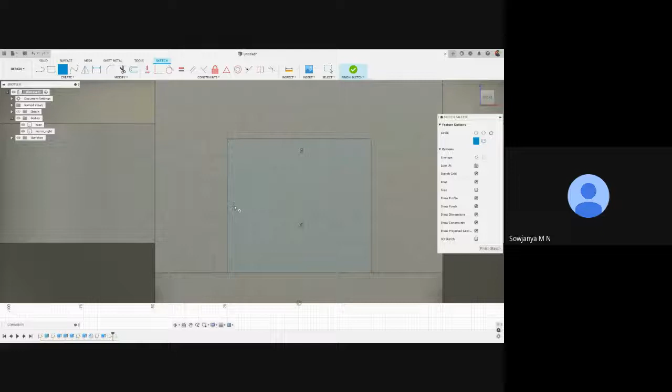It will draw a dotted line, so similarly I have to do it for the other side as well. I can see a triangle. Now I will just hover down in the straight line, and you can see both of these lines are shown, meaning I am exactly in the center of the box. Now this should be somewhere around

whatever shaft diameter you want. For this motor, I want it to be a 10 mm shaft diameter. I will now extrude it, and it will be somewhere around 5 mm, should be more than enough. Here I will join it because I want the shaft of the motor to be joined with the motor. It should be one single body, so I am using join.

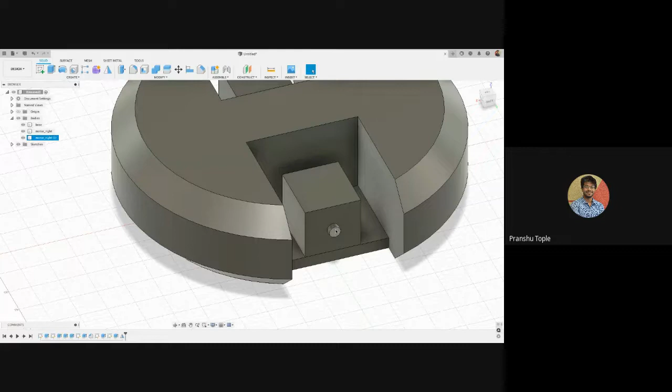I will press OK. Now if I want to hide the base, I can hide the base. I still have the motor. Now if I get ahead in the timeline, you can see the motor we made as a mirror, and it will also have the new shaft that we made. So this is how you can scrub back and forth between the timeline, and the changes will be affected. So no matter if you make any mistake previously, you can correct that mistake later on.

Okay, so I will rename this motor as motor underscore left.

So what is the next important thing in a robot? After base is done, after motors are done, it's the wheels. So let's make a wheel. So where is the wheel? Wheel will be connected to this shaft, so I will select this shaft.

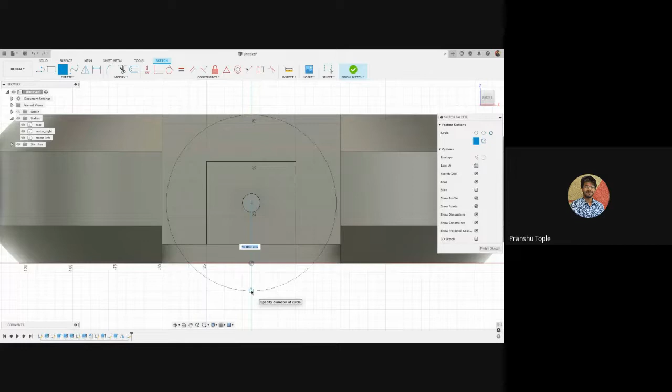And here I will create a circular wheel. So here I'm just making sure that the wheel doesn't collide with the sides. I guess 95 mm diameter wheels is perfect for this. I will finish the sketch.

Here I can select it. If I want the wheel to have a hollow inside, I can just select this one face. So if I extrude it now, it will have a hollow wheel like this. But if I also select this face, it will be a solid wheel like this. So depending upon your necessity, you can choose it.

And I guess 25 mm thickness wheel is more than enough. Again, just make sure this operation is set to a new body, because we are making a new thing, not joining it to the motor. New body. Okay, what is this? This is wheel height. Okay, there we have a wheel.

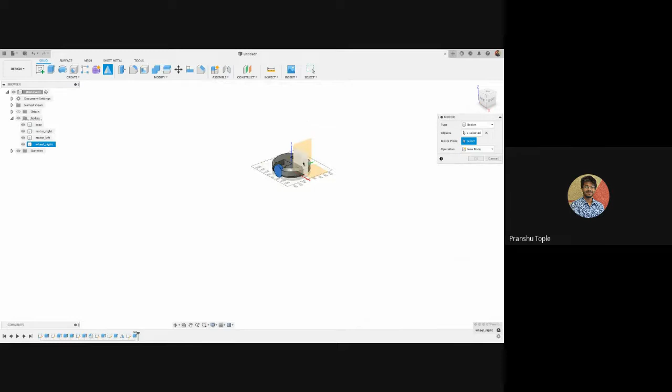Now I want to mirror this wheel. I will select the wheel, click on mirror, and select the mirror plane. What is the mirror plane? I will zoom out so that I can see the origins of this, and this is my mirror plane, exact center. And now we have another wheel on the other side.

Any doubts until now? It's a very basic design. If you're not getting it, please let me know, because it can be very difficult later on. So if you have any doubts until now, I can reconsider it.

Sir, can we do the same thing by using the timeline? Meaning the wheel is automatically added with the use of mirror? No. Why not? Because at the time of mirroring, we only mirrored the motor, we didn't mirror the wheel. Wheel is a separate object that we are creating. Yeah, there is one way to do it, but it will become complicated.

I can show you if you want. So I will undo this. Okay, so now I'm not creating this wheel as well. I'm just going back, instead of undoing, let's get back to where we actually made the wheel.

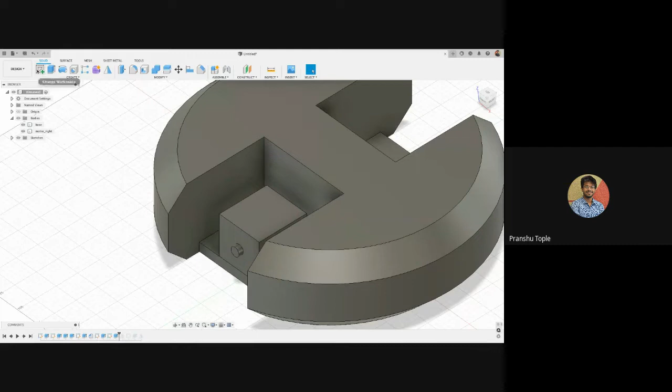Yeah, we have the motor now, so this is the future of the timeline. I will just add a wheel. From this, I will make a circle of 95 mm diameter. I will select the faces. If you want to select multiple faces, please press Shift or Control. Press E to extrude it externally, like 25 mm. This time while joining, I don't want join, I want it as a new body.

Okay, now if I take it one step ahead, you can see only the motor is mirrored. So what I can do is right click on the mirror, edit feature. So what does it say? Edit feature - what type of material or thing do I want to mirror? It is bodies - so these are all bodies.

Mirror plane is also selected, but how many objects are selected? It says only one object. So I can select one more object. So I can just go over here. I want to mirror motor as well as wheel. I guess it is not possible. It is showing me some error.

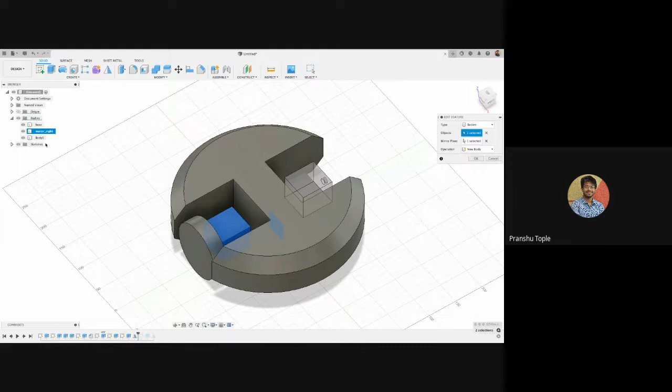Wait a minute. I will edit the feature again. I will deselect it. Now objects, I want wheel and motor. Okay. No, you cannot edit feature. You can only select one while mirroring. So it is not possible.

So there is one way you can do. You can just create one side of the robot and at the end you can just mirror them all one by one. So mirroring you can do at the end. I just wanted to show you how it will look. So that is the reason I made it like this. Okay. So now I guess this robot looks really good. If you want, you can add more things to it.

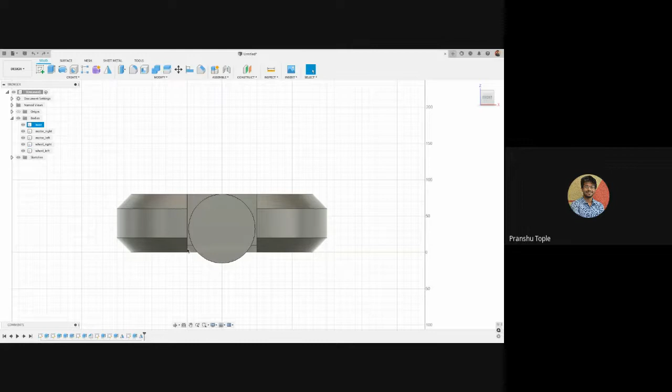So obviously our robot won't balance on two wheels. It will need something to balance on. It can be a caster wheel. A caster wheel is a very smooth wheel that we can use if the robot wants to move along. So if you see robot caster wheels, they are small ball kind of structure. So these are how caster wheels are available. Small balls that rotate freely so that the robot can move in all directions.

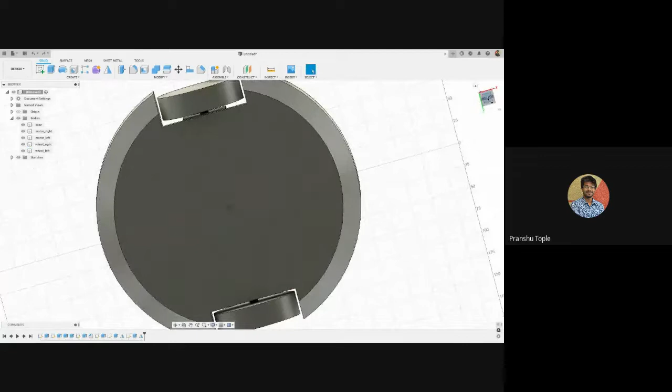So we are making something like this. Two wheels, a caster wheel in the front and the back, something like this. Okay, so let's make it. So we already have wheels. Let's make caster wheel at the bottom so that it has something to balance on. So here, what I will do is create a sketch. Where do I create a sketch? I create a sketch at the bottom face. This is my bottom face.

Now here, first I want to create mounting points for my caster wheel. So I want one mounting point over here. A 10 mm caster wheel is more than enough, and another mounting point over here. So one at the front, one at the back. Finish it. I will select this face, and again I will press Control on my keyboard and I will select this other face as well. So now these both faces are selected.

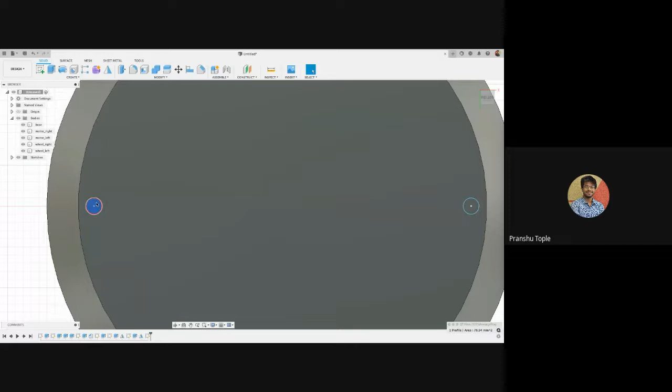If I wouldn't have pressed Control, if I select this face and then the second face, that will become unselected. So to select both the faces, I am pressing Control. Both the faces are selected. Now I will extrude it by a little bit. How much? I guess 5 mm is more than enough. And this time I will join because this is a mounting point, not a caster point. This is just a mounting point so that we can mount it together. So the mounting point is done.

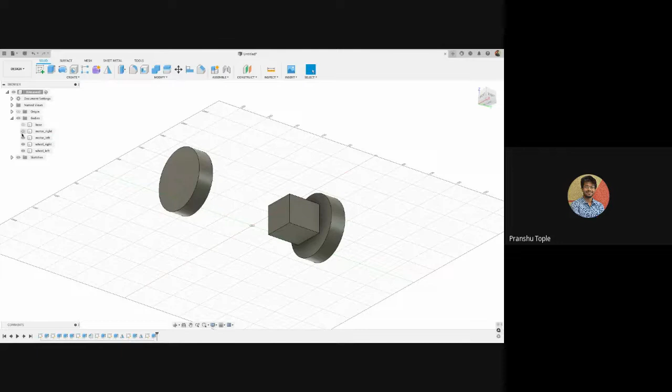Now over this mounting point. So now we can see if I go into home position, this is the base of the robot. This base has the mounting points added to it. We have two motors, which is motor right and motor left. And we have two wheels, wheel right, wheel left. If I just want to work on base, I can work like this. If I just want to work on motors, I can just select these. I can deselect it. I can do whatever I want with these.

If you want other motors to be added into your design, if I want this motor, I will just right click over here, insert into current design. But before doing that, it will give me error because you can only add that if this is saved. It is not saved currently anywhere. So I will save it as fdpbot. Save it.

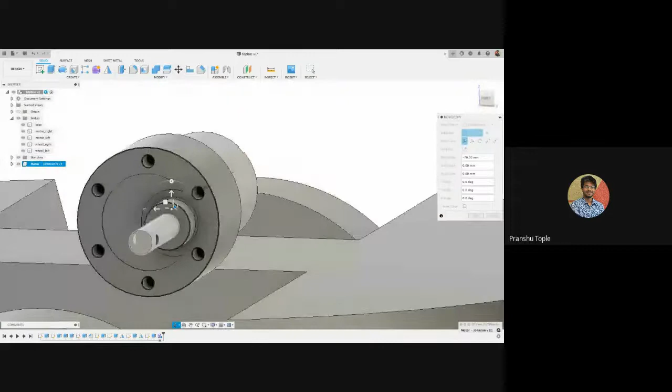Now I will insert into current design. This motor is inserted into current design. Now I can move it along wherever I want. So this is a very detailed motor. It has all the screw holes, it has all the gears inside. So you can use a detailed model like this, but as we are doing a very basic structure, that is the reason I am not showing you the detailed version. You can just make some basic geometric shapes and it will work the same.

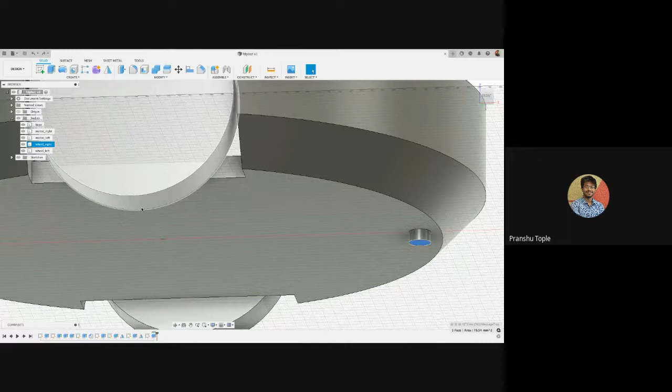Okay, now we have the mounting points, but as you can see, if we draw a line somewhere over here, this doesn't touch because we still need a caster. So for making the caster, first we need to find what is the height between this face and the tangent of the wheel. Why the tangent of the wheel? Because our tangent of the wheel will be our floor, right? So how can I make a tangent to the wheel?

I will click on this and construct a tangent plane. So I want to construct a tangent plane. I will click over here and I will select this bottom face. So I'll just click on the bottom. See, a tangent plane is created. This is the yellow plane, which is tangent to this wheel. If I want to put it at some angle, I will put it. If not, I will just keep it at 0 degree and I will press OK.

So now I have two faces. I have this one face and I have this second face. I want to measure what is the difference between them. Just by the measurements that I took previously, I guess it should be around 10 mm, but let's check. How can you check? You can use a tool called inspect. So here in inspect, I can use measure.

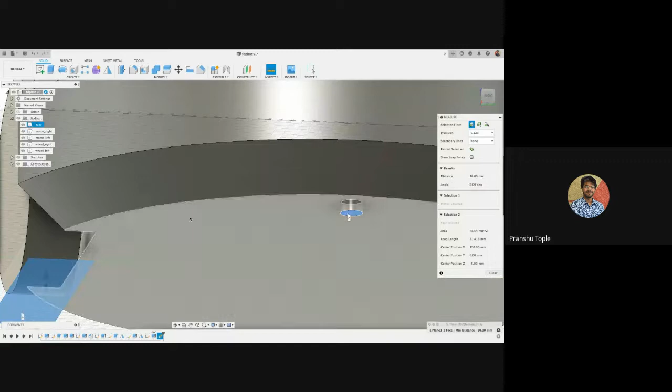I want to measure distance between this plane. I'm selecting this plane and this small plane. Here it will print it. The distance is 10 mm. Here it will also show. So if you see right here, it is showing. Like this is the plane and the height is 10 mm.

That's great. So now, if I want to hide this construction, I can just hide it over here. Or if I just want to hide this specific construction, I can click over here, so that in future, if we make any new construction, those will be visible, but this won't be. So now I will again go down. I will click on this face. Again, I will click on this face. Okay. And I will extrude them again.

And this time it will be 10 mm because that is how much we want. But this time, instead of joining, it will be a new body. These will be created as new bodies. Okay. And I will press OK. So now we have two casters. This will be the caster in front. Caster, sorry. This will be caster in back.

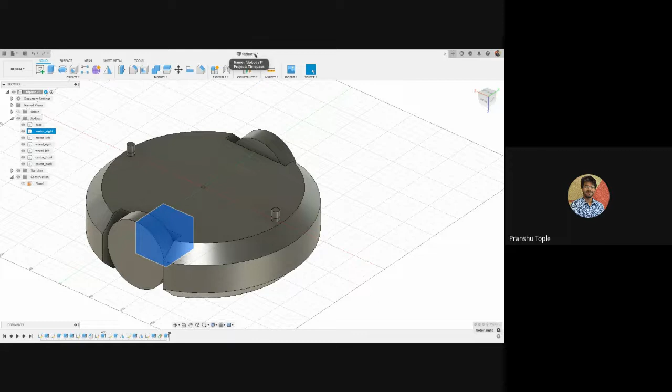Just make sure whatever name you give, please have it in small letters. Don't keep any capital letters. Even the name of the robot that you are giving to save the file, please keep it lowercase, no uppercase characters, because whenever we convert it into URDF, it will create problems. So please make sure everything is in lowercase characters.

Okay. Now, technically, everything is in place. These are touching the ground exactly as wheels, but obviously there is a huge surface area along which these are touching ground. So this will create a lot of friction, which is not good. So what I can do is I can create a curve. So just like the caster wheels that we saw previously, I can create a fillet.

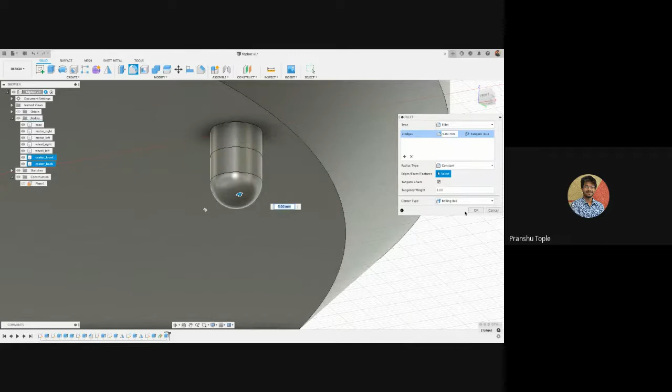So I will click on fillet. I will press control so that I can select multiple things. So this is the one fillet which I want to make. And this is another fillet here on this circle I want to create. And how much I want to create, I will just push it inside until it's a very clean, smooth semicircle. And I will press OK. So now this looks a lot more like the caster wheel. Understand?

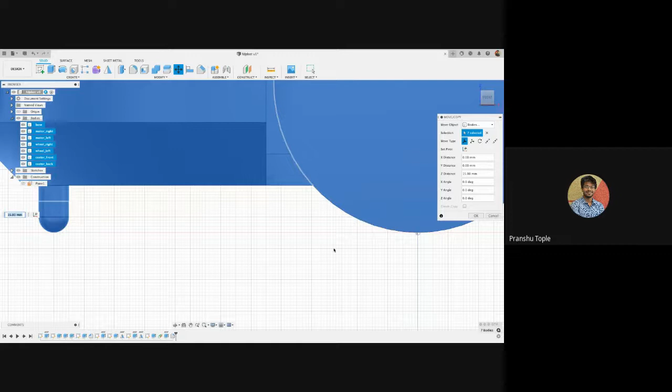Now, if you see from the side, if this is the baseline, the red line, if this is the x-axis, our robot is below the x-axis, right? We want our robot to be above it. So how can I do this? I can select multiple of these using control, okay, and press M to move. Now I can move this up. So I will just move it enough so that, yeah, it's touching the base. So we have moved it up by 15 mm. Now if you see, the shadow is also grayed properly and everything is in place.

So this is a basic robot. If I want to make it more advanced, I can make it. I can make multiple layers on it. So let's make it a little bit more fancy. We'll make multiple layers. This is the top layer I selected. I want some pillars on it. I will make a construction line and a circle. So this is my circle along which I want to make these small pieces, and I want it at 45 degrees.

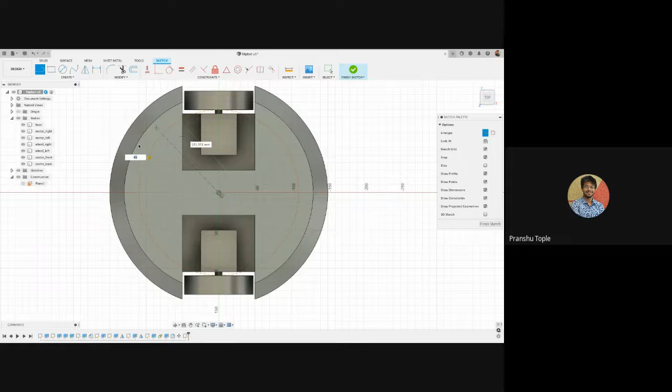So if I make it at 45 degrees, at this point, it will be equidistant. So here, these pillars I want in hexagonal shape. So I can make a circumscribed circle over here. Just make sure construction line is switched off. And here I want the thickness to be 2.5 mm. This is the radius, okay? This is radius. I will finish the sketch.

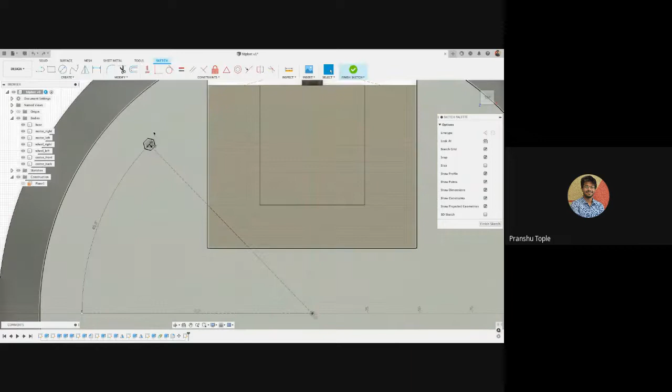I will extrude it. But instead of extruding, first I want it all along the circle. So what I can do is, I can go back to sketch. We are into the sketch mode. I will select this thing, select all 6 sides or select directly the sketch. I will go to create a circular pattern. It will ask me to select objects. Select all of these objects, which are the hexagonal lines. And what is the center point? The center point is this.

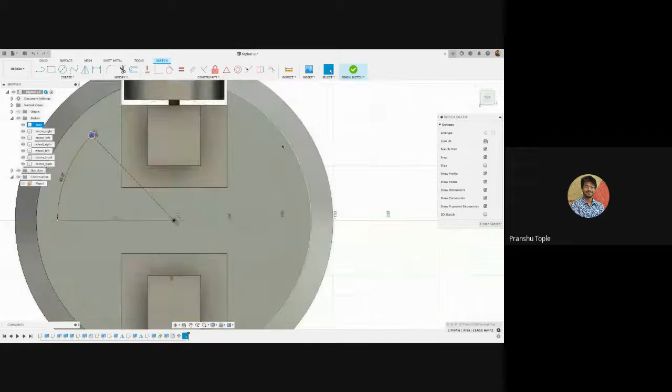Now it is asking how many I want. So it is by default 3. I will increase to 4. So here you can see one hexagon is here, one is made here, one is made here, and one is made here. So it's good. I will press OK. Now I have got 4 hexagons. I can simply extrude each hexagon at a time. I'm pressing Control at the same time so that I select all the hexagons together. My Control key is still pressed. And now I will press E to extrude them.

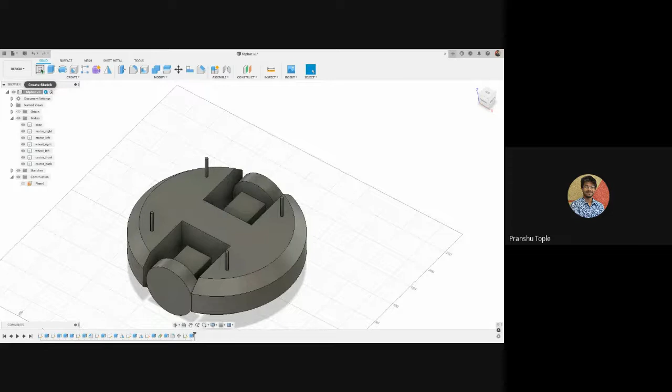And if I will extrude them, let's say for about, yes, 4 centimeters. 4 is more than enough. I will join this to the actual base. I don't want it to be separate. So here is our complete base. Now I want one more layer on top of it. It can be anything. So what can we add? We can add a simple circle. So let's add a circle on it. I will make a circle on this. A huge circle like this.

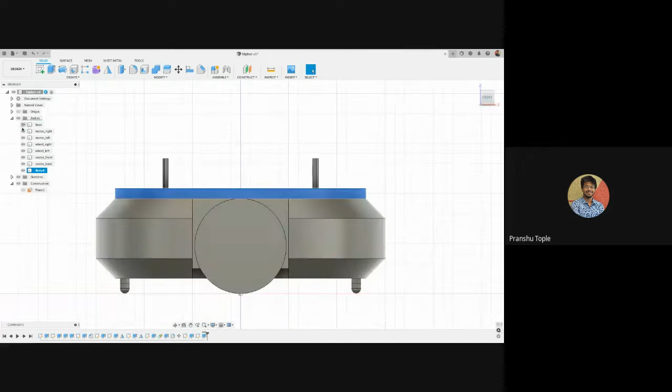Complete. Finish sketch. I will select all these faces using Control key. I'll just hide the base for a moment so that I can select these hexagons as well. And I will extrude it. I will extrude it 10 mm. It should be more than enough. Yes. Now I want this to be above the base. So I will take it somewhere over here. Great.

It's looking really good. Now I want to combine these two things. I want to combine the base and I want to combine this. So I can just select base, whatever is your parent. Okay. So I want base to be the parent. So we'll select first base and then the child. Press Control and then select the other part. And here there is an option for combining. If you don't see an option over here, click on Modify, Combine.

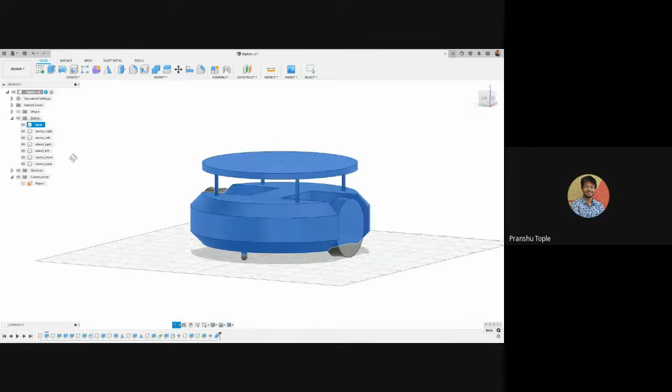Combine, it will ask what should be the operation. Should it be join? Should it be cut? What do you want? So mine is join. I will join it. Now this is one single base. This is how you can make a complete robot that looks like a Turtlebot. So what more was there in Turtlebot? Turtlebot 4. Let's see.

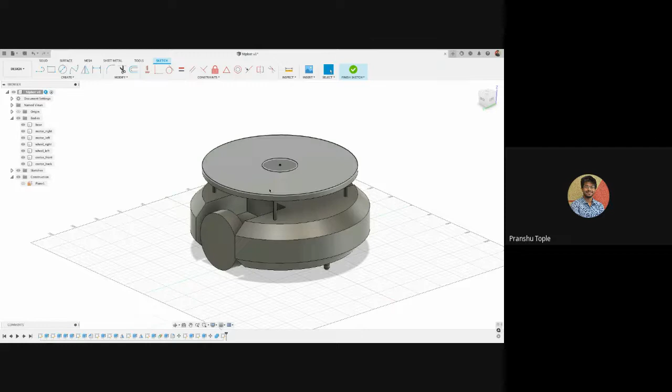Yeah, there is a LiDAR for navigation. There is a LiDAR. So let's add a LiDAR. So I want to add a LiDAR on top of it over here. Again, it will be a small LiDAR. So I guess 60 mm is more than enough for that as a diameter. Yes, I want a mounting base for the LiDAR. So what I will do is I will extrude a little bit of it. I will join it with the base, and then I will add a bigger LiDAR. So I will add 15 mm, and instead of joining, this will be a new body.

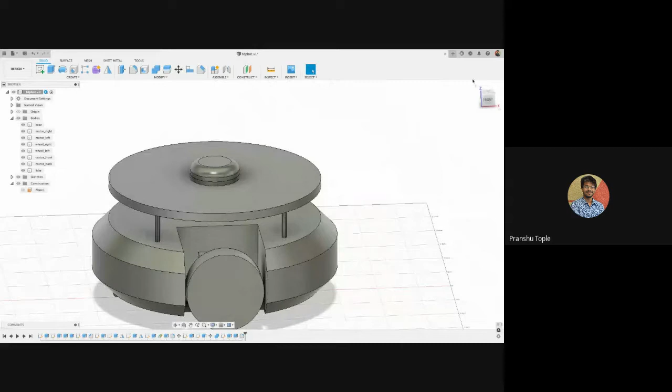Now I want something on the top to keep some stuff on it. Like if I'm making a waiter robot, I want some edge on top so that I can keep things on it. So let's make something for that. So I will create one more sketch over here.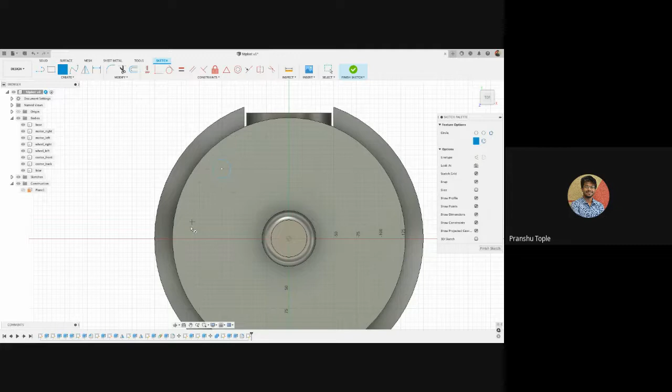I will make one more pillar, maybe two more pillars so that it has enough strength. 2 or 3, I guess, should be more than enough. This is a 120 centimeter, 20 mm pillar. And I will make a construction line through the center, and I will make a mirror of this across.

What is the mirror line? This is the mirror line. There you go. I will select these. I should extrude this at a certain height. Let's say 20 centimeters. There we go. Okay, this looks good. Now at the top, we want to make a circle once again. So I can select this.

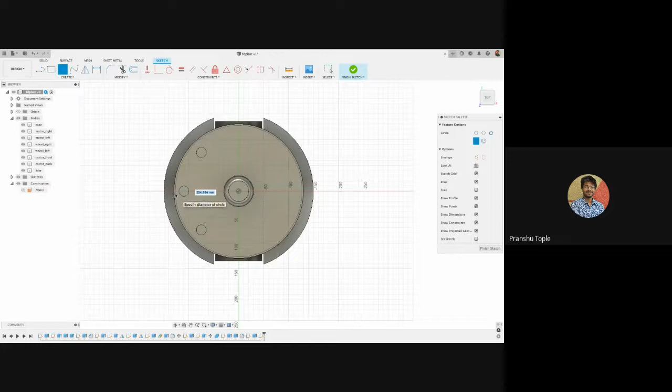I can make a circle, however big or small you want. It's up to you. I will select the circle. I will extrude it a little bit, like 10 mm. It's more than enough, and I will join it.

So now our LiDAR is able to see this much angle in the front. Remember, this X is the front. Everything should be with respect to that. So our LiDAR is able to see whatever is there in front. At the back, the pillars will block some rays, but we can remove those rays. I can just take it like 270 degrees, or 275, maybe at an angle. We can do that later on.

So now this is the robot. If you want to make it look fancy, you can do that. For example, right now we have made everything in one single type, but if I right click on the robot name, go to properties, and go into physical, here you see the mass is around 43,669 grams, which is equal to 43 kgs.

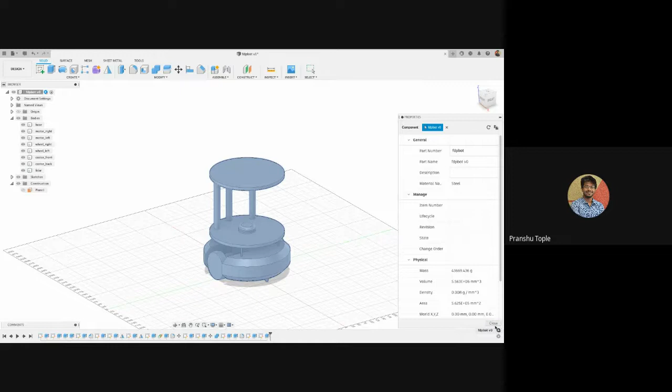Which is not actually correct. For a small robot like this, 43 kgs is not correct. Why is it so? If I right click on each and every thing, see, the physical material is set as steel. Even each and every small part is set as steel. So the CAD design software thinks the complete robot is made of solid steel. And obviously, if it were, it would weigh around 43 kgs. But in real life, that won't be true.

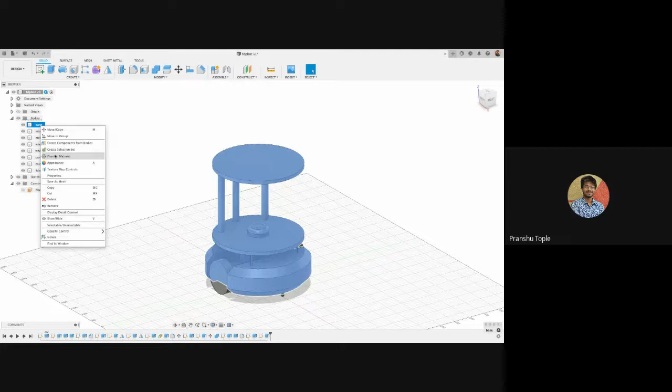So what can we do? We can give it properties. So let's give it properties. Okay. So on my base, I can right click and click on physical material. Here I will have a bunch of different materials that I can give. Let's say I want to make it of plastic, maybe 3D printing. For 3D printing, ABS plastic is used. So I can just drag this and drop this on the base.

Now you can see the base is converted to white color because that is the color of ABS plastic. I will close it. Now if I see the weight in the base properties, you can see it has changed to 5 kgs, which is actually okay. For motors, what is the current weight? It is 900 grams. Yes, the motors are made of steel, they are heavy. So the motor is okay. What is the weight of the wheel? Let's go to properties. It's around 1.3 kg.

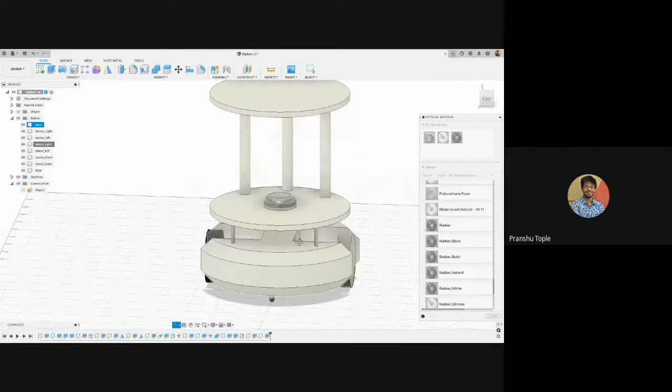Wheels are not that heavy. They are made of rubber. So let's change the physical material of the wheels. We have some other materials, something miscellaneous. This is plastic. Yeah, in plastic you can find rubber. So I can just give rubber to this wheel, and to the next wheel also I will give rubber. Just drag it and drop it.

Close it. Now if you see, first it was 1.3 kgs. Now it's 100 grams, which is right. That is usually the weight of wheels in robots. So the wheels automatically get the weight property. Now you might think, why do we need all these details?

If I go into properties for the wheel, here we can see there is center of mass, center of inertia, and moment of inertia. All these things are auto calculated, and they are needed for the actual simulation of our robot.

So whenever we are designing it, we should make sure that all the properties should be as close to real world as possible so that it simulates properly. Obviously, if you make a simulation of a 50 kg robot, and in real life you just make a 5 kg robot, the robot won't work the same. For moving a 50 kg robot, you should have much more velocity, much more torque, but in a 5 kg robot, even a small torque is able to move it. So that's the reason all these inertia and mass should be given properly.

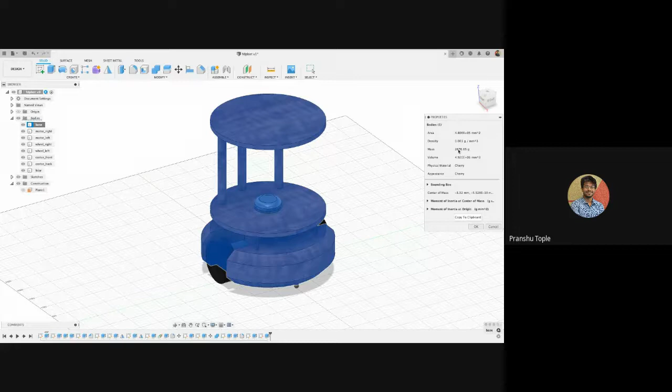So we have given the base as a 3D printed thing. If you want, you can make it out of wood as well. So there is wood, I guess it is on the bottom. Yeah, wood. If I like the cherry wood, I can make this complete thing of wood. How much weight will it be? Yeah, it will be 2 kgs, which is even lighter than 3D printing, which is good. Let's make it of cherry wood. Okay, so we have the base of wood.

Motors are made of steel. Wheels are made of rubber. What is the caster wheel made of? Even caster wheels are usually made of steel, and these are really small. So let's check the physical material. Yes, it is steel currently. And let's check the properties. It is 5 grams, which is okay, equal to the real weight. So caster front and back both are steel, it's okay.

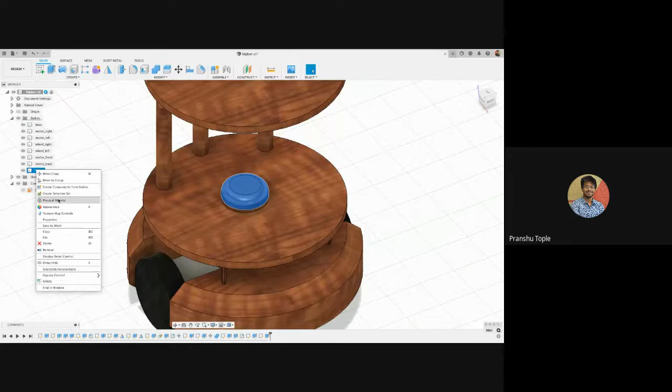Comes to LiDAR. What is the current weight of LiDAR? It is 300 grams. Usually a LiDAR weighs around 300 grams, a little bit more or less, but 300 grams is okay for a LiDAR. If you want, you can change the physical properties to plastic if it is completely made of plastic. But whenever you are working with a real robot, the main factor is the weight of wheels should be proper, the weight of the complete robot should be proper.

So if I right click now on the complete robot name and go to properties, physical, the complete weight of the robot is 5.2 kgs now, 5269 grams. So it is more or less equal to the weight of the TurtleBot. Let's check the TurtleBot 2, which was similar weight. Yeah, the weight was around 6.3 kgs, and we have around 5.27 kgs, which is almost equal. It had a little bit more electronics into it. So it's more or less equal to the TurtleBot, which is really good.

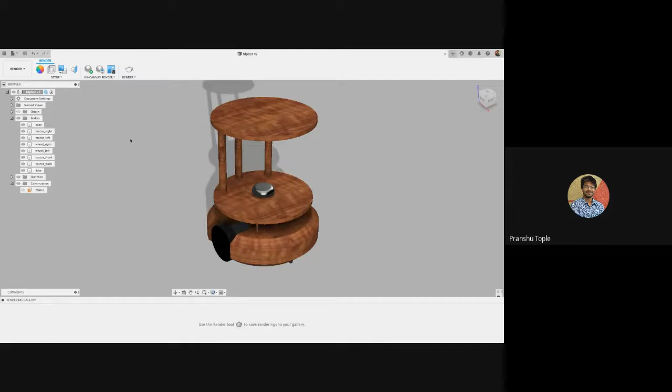So now we do have everything. Make sure to save your design. There is the save option. It's saved. Now, in the previous session, I showed you there are animations and rendering that we can do. So let's try out rendering. Why do I need rendering? If I want to show it to some client, I should be able to show him how it will look in real life. Right now it doesn't look like a very realistic model.

I have two options. I can render it on my machine or on a cloud machine. If my machine is very powerful, I can do it, but right now I don't think it is good. So let's render it in a cloud engine. Let's set an angle something like this. Okay, I like this area. Even here you can see there is a reflection of steel. This looks like wood. This looks like rubber. I will click on render.

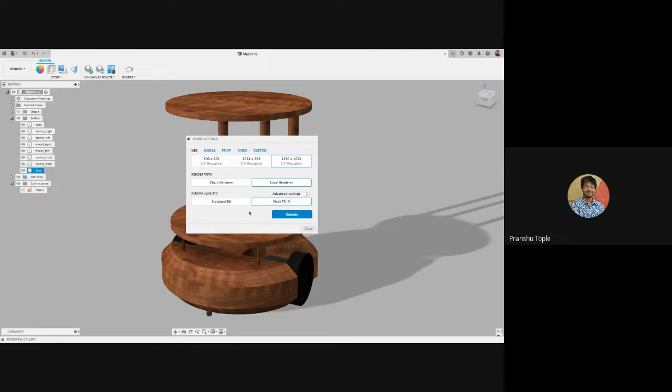Here I will select how many dimensions I want. I want it so I can put it on a website, so maybe 1.3 megapixel is more than enough. I want to do it on cloud render. If you want to do it on your machine, just press local render. Local render won't take anything from you, but cloud render will take some credits from you.

Whenever you create an account, you are given a certain number of credits. I have 94 credits remaining, and for this cloud render it is just asking me for one credit. After this, only 93 will be left. What should be the render quality?

Standard is okay quality, and final is very good quality. So I want to take final. How much time will it take? Less than 20 minutes. So I'll say okay, render.

It is submitting. Now it will take this exact camera view we have set and start rendering it on cloud, so I don't have to keep my machine occupied. I can do whatever else I want and add multiple renders at one time. Let's give it some time. It will submit itself, and I can close it.

Here you can see it is rendering that scene. If I want, I can edit the environment as well.

If I want to show how this robot will look in a warehouse, go to scene settings, click on this, and there is an environment library. If there's an agricultural robot you want, you can put it in a field, or put it somewhere else. It's up to you.

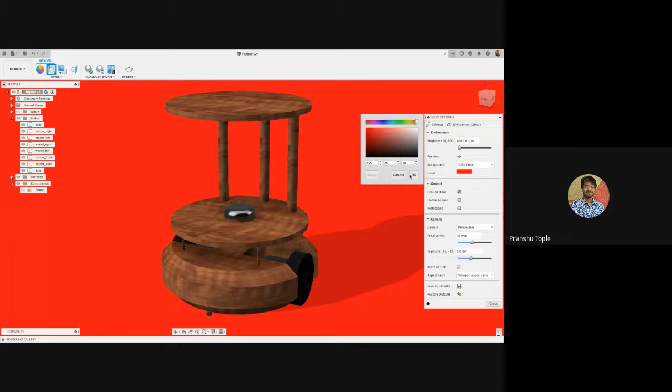But instead of solid color, I want an environment. So I'll select environment, and in environments, these are all the environments I have. I want the field one. I'll just drag and drop it over here. Once I drag and drop it, it will take some time to load, and there we have it. I'll just close this.

I have my robot in the field. I can just rotate it like this and show how it will look in the field. I have a complete 3D model, so I can drag and drop it wherever I want.

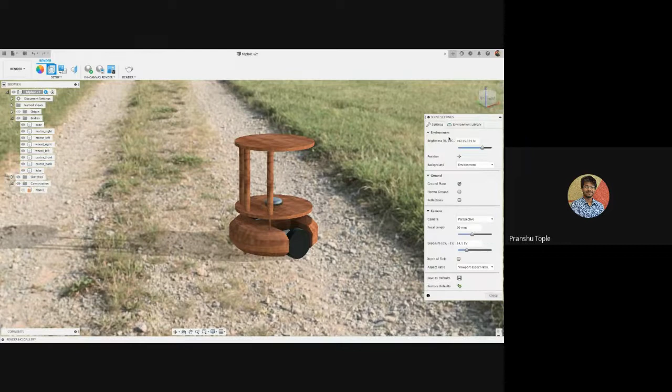So where will this be used? This will be used in a restaurant kind of environment, right? So let's put it in a restaurant environment. But here in environment, there are very limited environments you can use. So where can you find more environments?

If you Google, there is a place called HDRI Haven. It's now renamed Poly Haven, but previously it was HDRI Haven. Here you will find HDRIs, which are the environments. I'll click on browse HDRI.

Now I want this robot to be somewhere indoor, so here I have options like indoor. It's like a normal search engine, and I can have something like a house. Let's take this one, this looks good, Christmas photo, Christmas studio. It's a complete environment we can put it in.

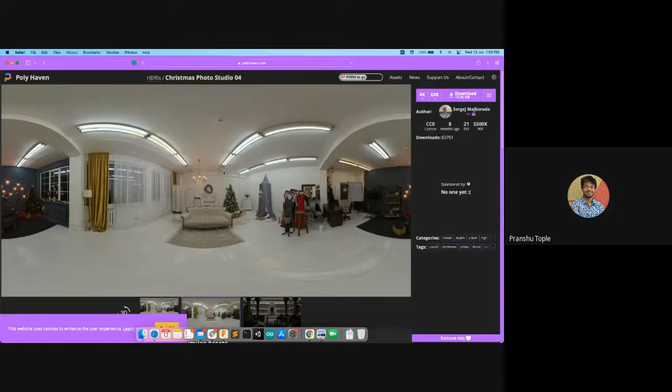If I want to watch it in 3D, I can click 3D. This only works in Chrome, so I'll put it in Chrome and see it. Okay, I'll put it in 3D. Now I can see it.

This looks like a good environment. I can place my robot somewhere over here near the sofa or something, and this will be a good photo to capture for a render.

There is one more thing you can do. Again, I'll go to HDRI Haven, now Poly Haven. If I want a restaurant, I search RESTAU, restaurant, and there we have it. I'll click on 3D.

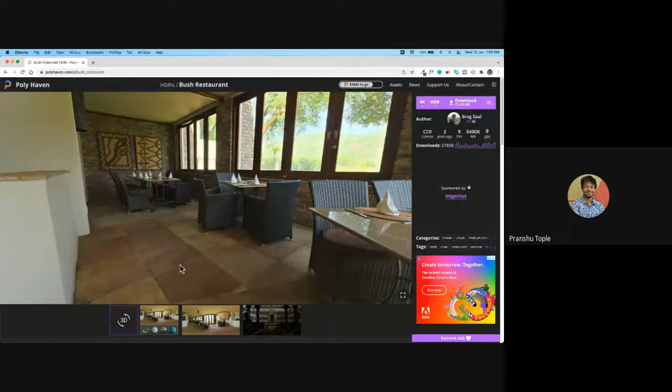Now I can view the restaurant in 3D. It looks good, so I can place any robot over here and it will look like it is serving something. Let's take this one. It's just 25 MB, so I'll download it.

It is being downloaded. Done. Now to put it over here, I'll go into scene settings, environment library, and here I'll attach a custom environment. Let's browse to where I've downloaded it. Here you can see Bush Restaurant 4K HDR. I'll open it. It will take some time to get uploaded.

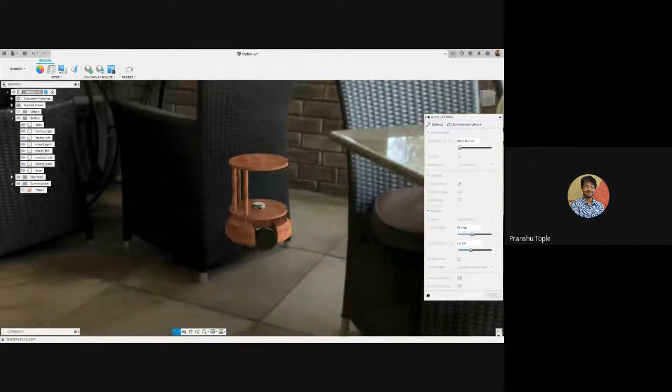Until then we can wait, or else we can see the render. Yeah, it's done. Now if I go to settings, I can orient it properly. If I want more focal length, I can increase like a perspective view. Usually the cameras we use have a focal length of 50mm. I can just place it somewhere like this.

This looks good to me. I can render this as well. Once I'm happy with the position and everything, I can click render. All these remain the same. Click on render, and it will submit.

I will close it. Let's place it somewhere else as well, on that table over there. I'll keep it somewhere over there.

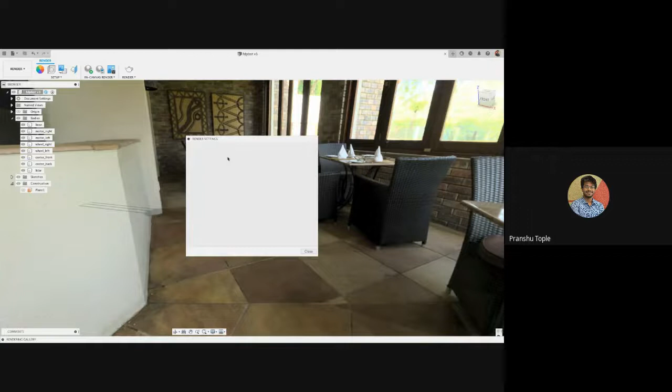Yeah, this looks good. I will render it. Render. And where are these renderings stored? So again, these renderings are on cloud. So if I click over here, render gallery, this is the first render that we provided. It's almost done. So if I open it, see, this was the render.

So it has an actual wood texture. It has actual steel texture for the LiDAR. If I want to download, I can download it as a PNG. Do I need a transparent background or not? It's up to you. If you want to put it on a website with nothing in the background, you can select this. If you want the background, you can download it as a PNG.

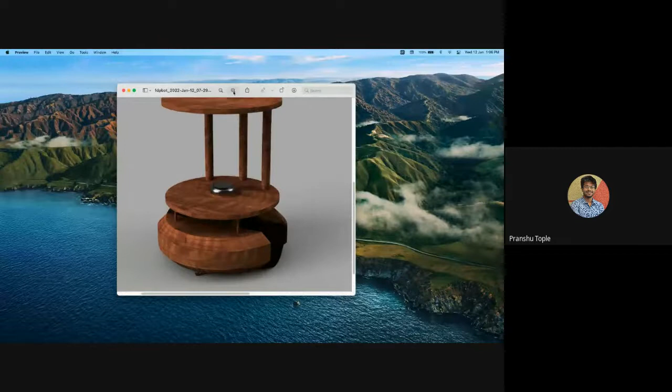Now it will be downloaded on my PC. It will ask where you want to save. Let's save it on desktop and I will open it. Wait a minute, on desktop. Yeah, there we have it. This is the thing that we rendered. I can zoom in, I can see all the details. So these are just images.

Okay, now one more image that we did. Yeah, I will download it as a PNG, and also I will download this one, the first one. Yeah, again, this will be on desktop, save. I want to download this with a transparent background as a PNG.

There is some error in this. Let's see what was the error. Your rendering could not be rendered because an error occurred. So again, we can put one more rendering if we want, or we can close it. I guess there is one which is being made. That is more than enough. Yeah, this is there. So it looks like it is actually in the environment.

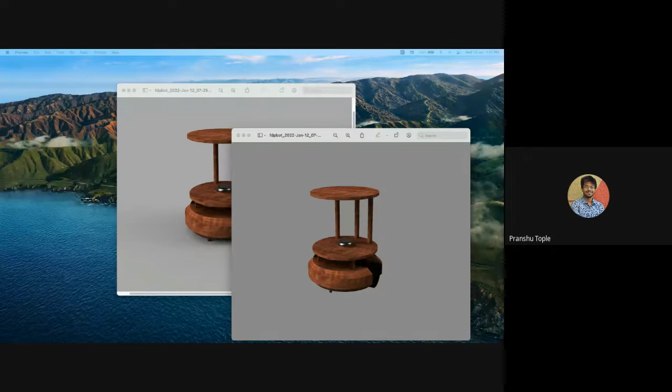Okay, so yep, this is how it looks. There is one more with a transparent background. Yeah, so this gray thing, it's like a transparency thing. So if you put it somewhere, it will be transparent. So even here I can set the background, I guess. Yeah, general, window background if I want, right? So it is completely transparent. Okay, so yeah, you can put it on websites or places like this.

So we have used a lot of these renders on the website of TortoiseBot. So I will show you a couple of things. TortoiseBot. Yeah. So this was a render which was transparent. So due to transparency, you can see it is created like this. Even this was transparent. Then are there any more? Yeah, this was a white, I guess.

Apart from that, I will show you some of the... Excuse me.

Yes, I was saying that there are a lot of places where these renders can be used. So I will show you a couple of renders that we have made. If you go on to Rigbetel Labs, if you see this post, so again, the restaurant that I showed you, this is a render. This is a design made by one of our students who was studying ROS mentorship, and this is designed by him. This robot is made by him, but this is a render. This is a CAD design put into a render.

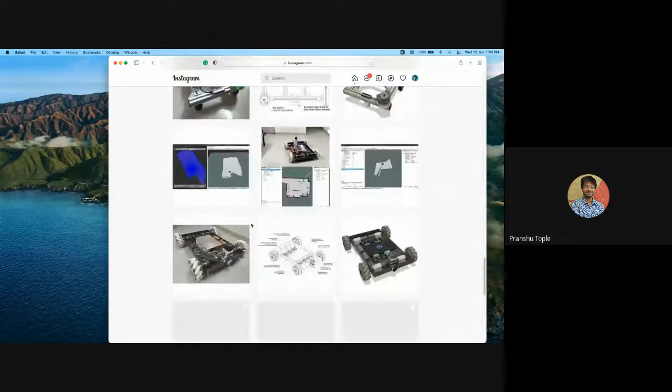So this is not an actual warehouse. This is not an actual robot. This is just a CAD design designed in Fusion 360, and it is being shown like it is picking up boxes from warehouses. This is a complete render. It is being shown like these boxes have been picked up and it is going somewhere else taking those boxes. You can see the shadow actually matches the environment.

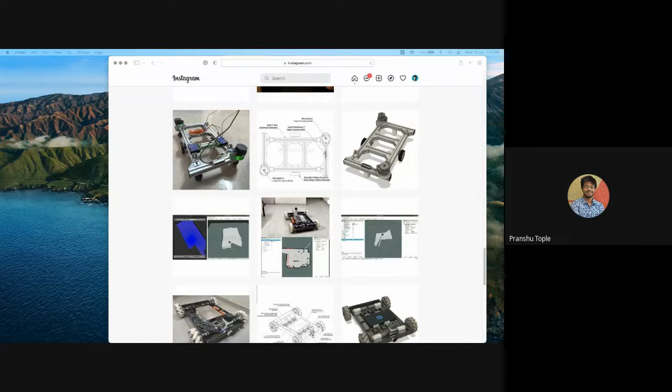So that was one render. I guess I have a couple more. Let me see. Okay, I don't have all of those on my PC, but it's okay. But you get the idea that this is how renders can be created, and this is one of the best renders that we created. It looks really original, and it looks like a real robot. So now once you understand how rendering works, let's look at the animation thing.

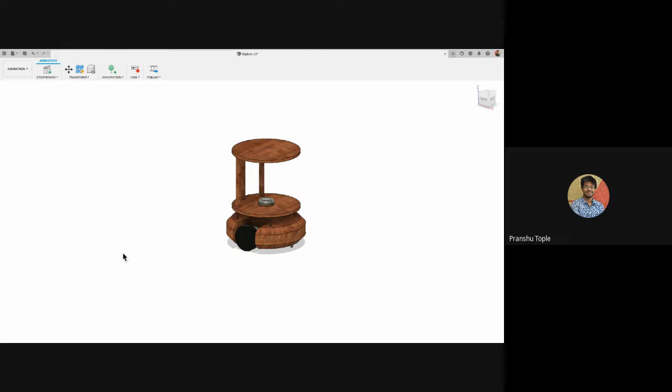So in the morning there was a question asked by Pramod sir, saying can all the explosions and things be manually done or is it automatic? So there are both ways to do it.

But while working with animation, you can see there are no components visible. There is only just one robot. So for working with animation, you need to convert the bodies into components. Let's get back into the design side.

This was the robot that we made, right? So all of these are bodies. This comes into bodies, okay? But we need to convert it into components.

So for converting into components, you have to just right click on the bodies and click create components from bodies. It will convert all the bodies to components. But before doing that, please note, whenever you are doing any modifications, please do it in the bodies mode.

Right now I am totally happy with this robot. I do not want to make any changes to this robot, hence I am converting into components. If you are not sure whether you are going to change the design or not, then don't convert it into components. Make everything into bodies.

Align everything properly, make sure it is aligned properly, make sure it is in the center of the arena. Everything should be in bodies, with no different components or anything like that. Just make sure of that, okay.

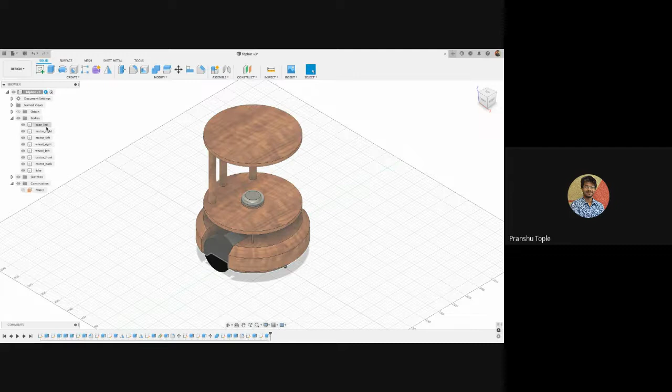If you want to add more electronics like Raspberry Pi and stuff, you can add it over here, you can place it wherever you want. And one more important thing, the base of the robot should always be named as base underscore link. This is one of the important rules, that the base of the robot should be named base underscore link.

Everything in small letters, okay. So I've done all the modifications. I've changed the material, I've changed the weight, I've changed how it looks. I am happy with all the positions and everything. Now what I will do is I will right click on bodies and click on create components from bodies.

Now everything is created into components. See, these are separate components that are created. There is no section for bodies now. Each and everything is a separate component.

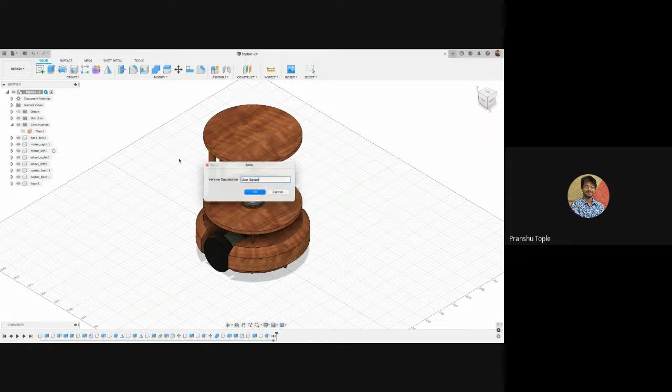So now if I save it and go to animation, now I can see different components. Previously it was not visible. So now I have all the components.

Now I will get this, this is the animation timeline. So here I can tell it what to do, how to do it. I will take it to the 0th second, here you can see what second it is. I will remove whatever is there, and at the 0th position I will select what camera angle I want.

Let's say I want a camera angle something like this, in the beginning I want this. Then after 2 seconds, or during these 2 seconds, I want this camera angle to move like this or something like this. It will create an animation automatically.

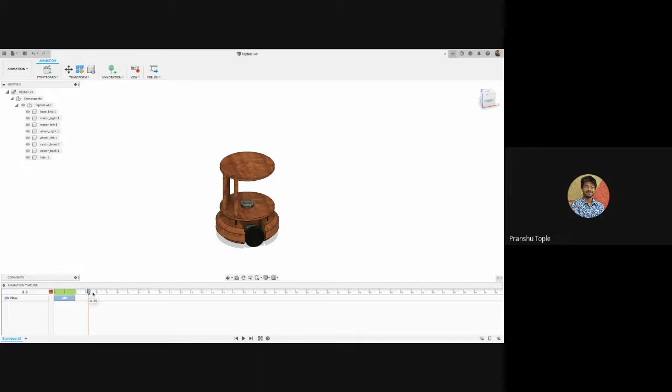Let's create one more thing. After 4 seconds I want the camera panning like this, and after 6 I want it to be like this. So now if I play the animation, you can see it has created all the steps in between autonomously.

Okay, now after 6, until 10 seconds, I want it to explode. So here if I click on transform, auto explode all levels, it says no available components for exploding. So first select the components.

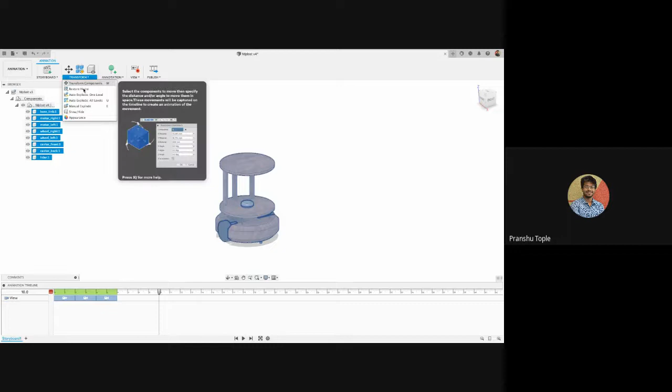I will select it all one by one. Now I will click on transform, auto explode all levels. So it will ask what type of explosion do you want. I can select how big the explosion I want it to be.

See, it's at the bottom stage where everything is very close to each other, and this is like a very, they are all taken apart. So in auto explosion, it doesn't know. In this case, see, this wheel is being taken out, this is being taken out, this wheel is being moved down, and this motor has been taken out. But it is automatic, you don't have to do anything.

So it's automatic however you want. Okay, and once it is done, I can save it. I can place a tick mark, and I will play this animation. So you can see.

So auto explosion is a shortcut, but sometimes it works very well, sometimes it doesn't work really well. If you are in a hurry and just want to show all the components that are there, then you can do this. But if you have enough time, you can make an explosion of your own.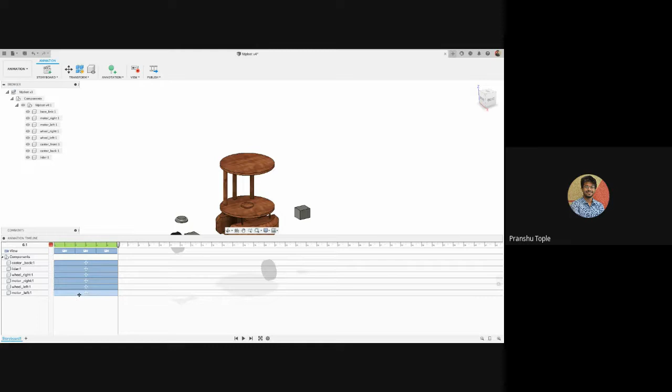How can you make an explosion? So currently we have moved our parts. Now I can move these parts one by one. I know I want this motor and wheel to be moved somewhere over here. I will just wait a minute. I will select right motor, right wheel, and I will move it.

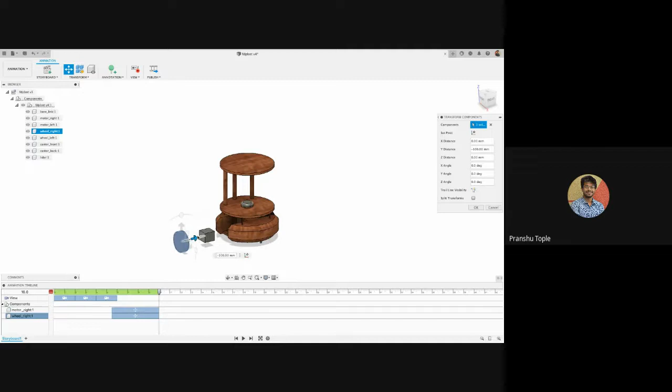Wait a minute. I will select right motor, right wheel. I will move it in this direction. Press OK. And I want the wheel to be more outside, so I can keep it somewhere over here.

Similarly with the left motor, left wheel, I want it to explode in this direction. I want the wheel to be more outside, so I will take it over here. I want the LiDAR to be brought forward and a little bit up, and the caster wheels, caster front and back, I want them to go down,

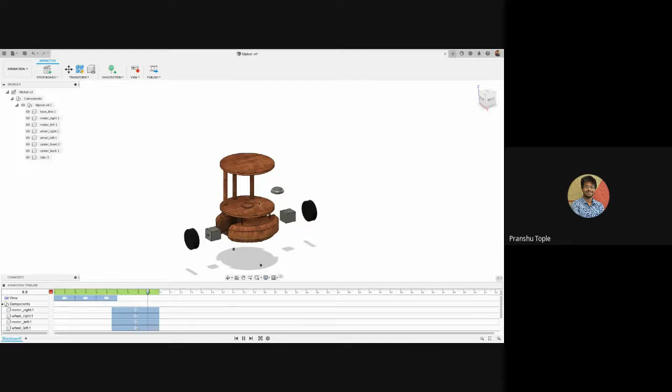and this looks okay. So now if I play the animation, you can see first it is rotating. Yeah, and after this it will explode. See? If I want it to explode during the rotation, then what I can do is I can move these bars behind. So this is like the motion part.

So this is the camera angle. So there you can see the camera view, and here you can see if I want to extend the duration to 6 seconds, I can do it.

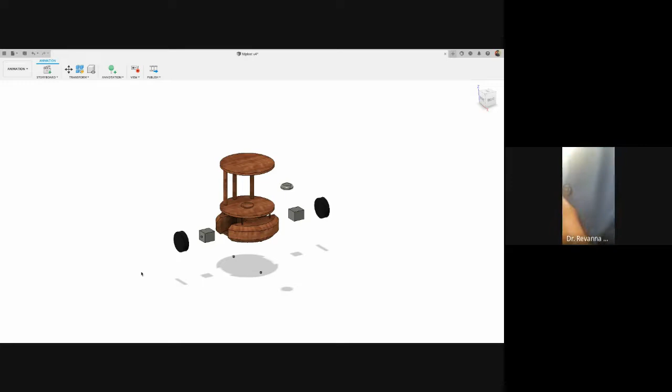Okay, so now let's see the animation. I will play it from the start. So see, everything is exploding, and at the same time everything is coming down. Now if I want it to come back to the original position, I can click on transform.

Okay, I will first select all the components. I've selected all the components. Click on transform and click on restore home. So here they have restored home. Everything has come back.

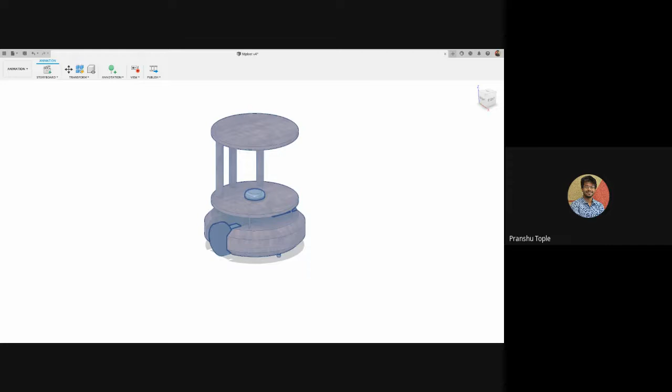Sir, there is a little bit of disturbance, please. Dr. Revanna, can you please mute yourself? Is there any admin on the call? Can they please mute Dr. Revanna? Is there any admin on the call who is managing? Because I don't have permission to mute him. Okay, so let's go ahead.

So as I said, it has restored home. So if I now play the animation, it comes back to the original position. So now if I like this animation, I can save it as a video. Here you can select what resolution you want. So I want it at 1080 pixel resolution.

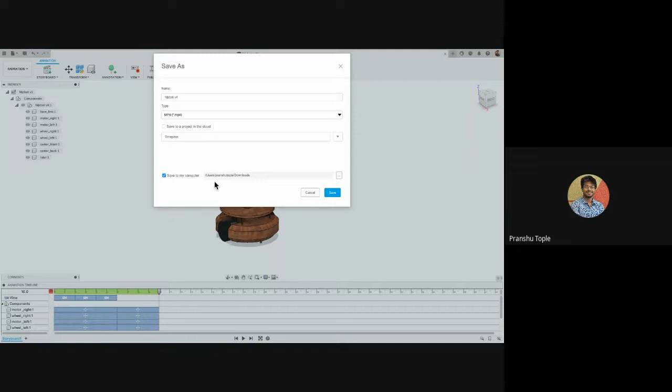I will press OK. It will ask the file format. I want it as MP4. Where do I want it? I don't want it saved on a cloud. I want it saved on my computer in my downloads folder. So see, it is

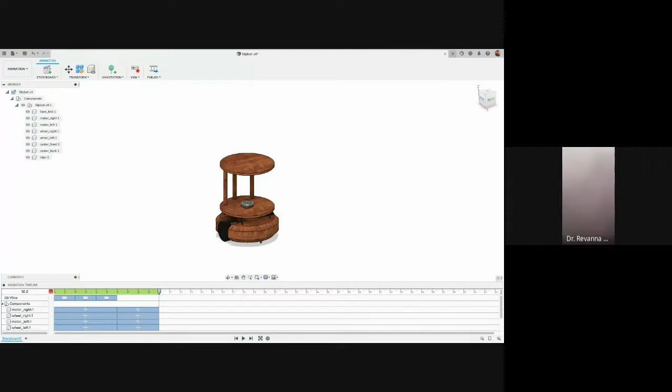Is there any admin on the call? Anyone from the organizing team?

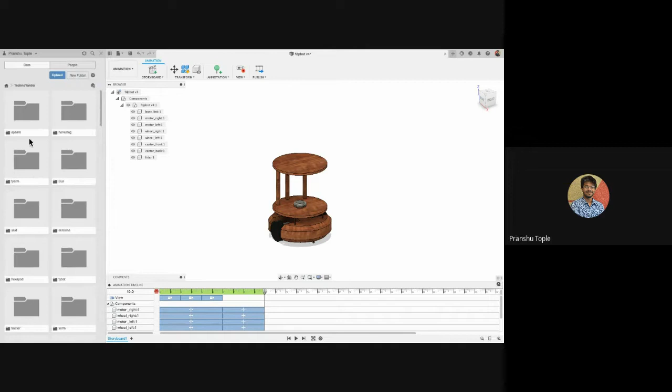Okay, better. Yeah. So now we have the animation over here. If you want, you can do complex animations. You can make things on your own. So I have a couple of animations that I could show you that I created for some of the clients. I guess, where was it? Yeah, it was the warehouse robot or a library robot.

Yes. So this was one of the videos that we made. It's being played over here. Just give me a moment. In Technoyantra. Yeah, library bot. I will just download it on my computer so that we can view it together. Is there any other video that I can show you? I guess separator is okay. Yeah. Until the time we get these videos downloaded.

So this was it for the designing part. So we have almost made the robot design. We have all the components in place. We have all the parts of the robot in place. We have the weights and everything, mass, in the proper way.

Now the only thing remaining is to convert this into URDF so that we can simulate it. And it's a really simple procedure that we will be seeing in the next session at 2:30 p.m. Until now, are there any doubts?

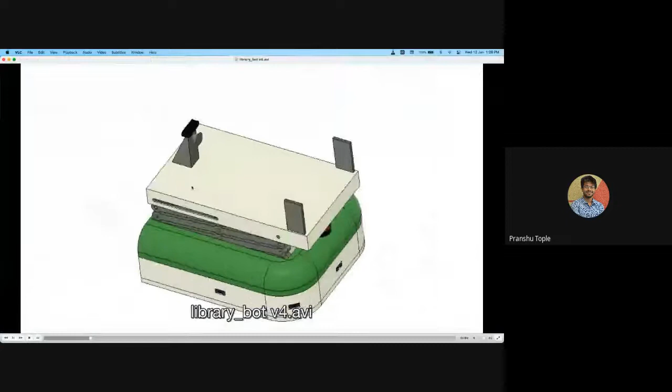So I guess the videos are downloaded. Let's have a look at some of the videos that we made. Here it was a robot that can be used in a library. Let's consider there is a book. We explained that there will be a suction mechanism. It will check the QR code, pick it, and hold the book so that all the pages are closed properly. This was one video. There was another video on how it will be stacking.

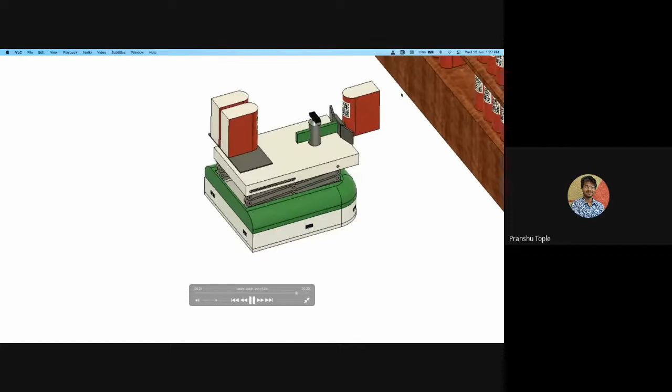So there will be a rotating mechanism like this, and a small rotary arm over here with a camera on top. So it can pick up any book it wants. If it wants the first book, it will slide it autonomously, grab it, and go and place it in the section. This was made for a library. This is the same robot that I showed you on Instagram on Technoyantra's channel. This is the robot, if you wish to see, and this is the render.

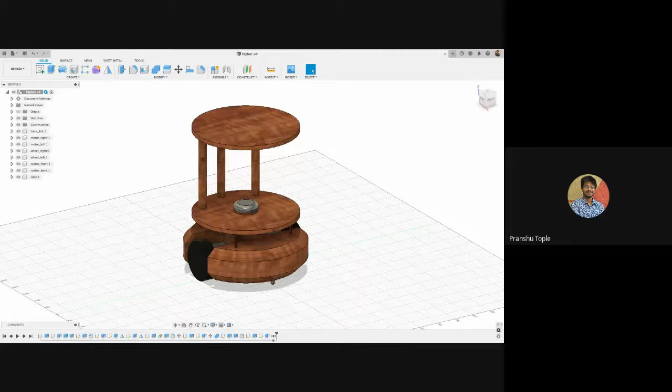Sir, you could explode it automatically? In the last one you exploded it manually, correct? Yes, exactly. Okay, thanks. So not just explosion, but as you saw in the library bot video, I can have each and every joint animate on its own. It was a very big timeline that I made, and inside it I controlled each and every joint. You can make animations like that too. Okay, sir. Thanks.

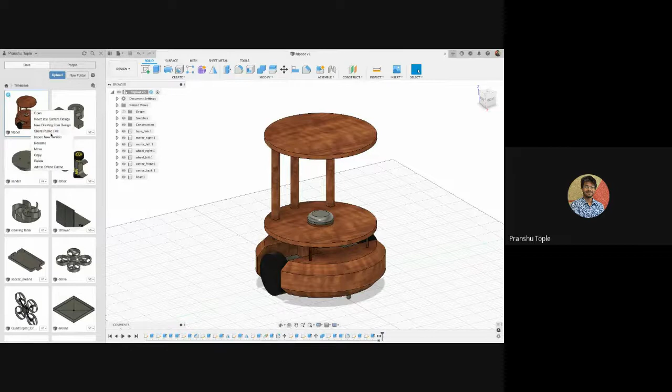In the next session, let's meet after 1 hour after the lunch break, and we will be making a URDF of this robot and simulating it. If anyone wants access to this design, I can share a link. I'm not keeping any password. There you go. If you want to view it, you can have a look at it.